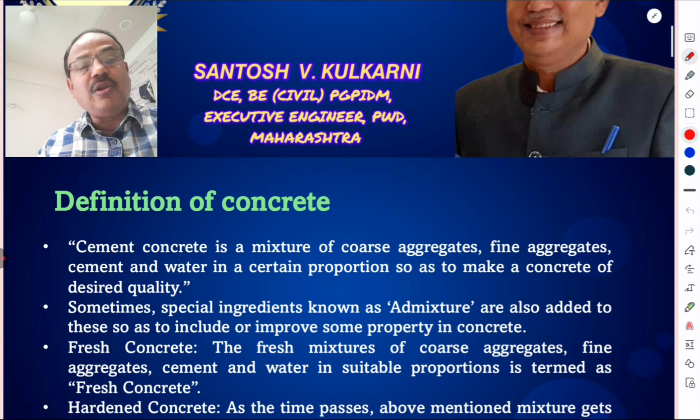First of all, what is the definition of concrete? Cement concrete is a mixture of coarse aggregate, fine aggregate, cement and water in certain proportion so as to make a mass of desired quality. Instead of concrete, I am saying that it is a mass. So this is the definition of concrete.

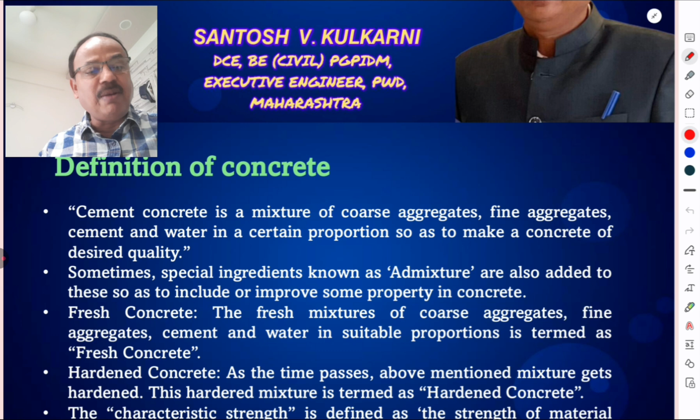Fresh concrete is the fresh mixture of coarse aggregate, fine aggregate, cement and water in suitable proportion, termed as fresh concrete.

Then what is hardened concrete? As the time passes, the above mentioned mixture gets hardened. This hardened mixture is termed as hardened concrete.

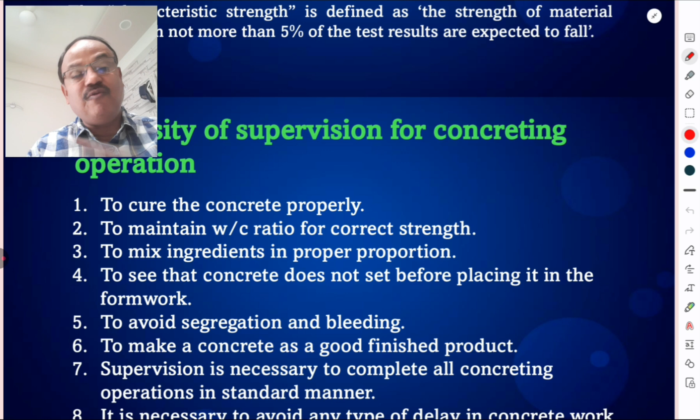Supervision is necessary to complete all concreting operations in a standard manner. It is necessary to avoid any type of delay in concrete work.

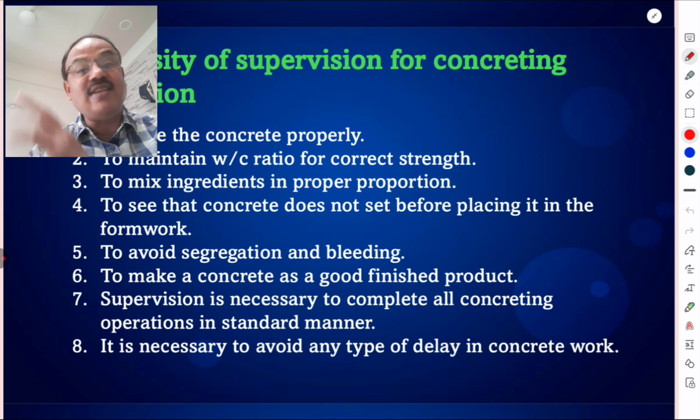The concrete grade lower than M20 are not suitable for RCC works, and grades of concrete lower than M35 are not to be used for pre-stressed concrete works.

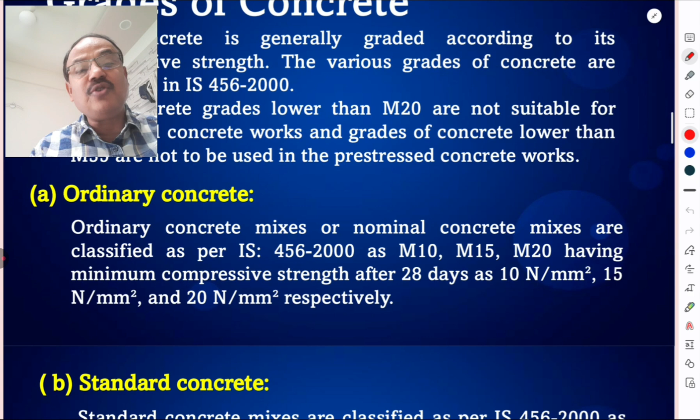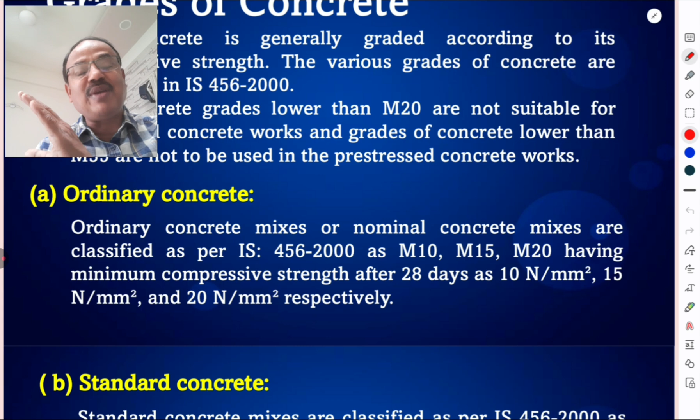Ordinary concrete mixes or nominal concrete mixes are classified as per IS 456-2000 as M10, M15, M20 having minimum compressive strength after 28 days as 10 Newton per mm square, 15 Newton per mm square and 20 Newton per mm square, meaning 20 megapascal respectively.

Then standard concrete. Standard concrete mixes are classified as per IS 456-2000 as M25, M30, M35, M40, M45, M50 and M55, having minimum compressive strength after 28 days where that number indicates the compressive strength in MPa or Newton per mm square. It is so simple.

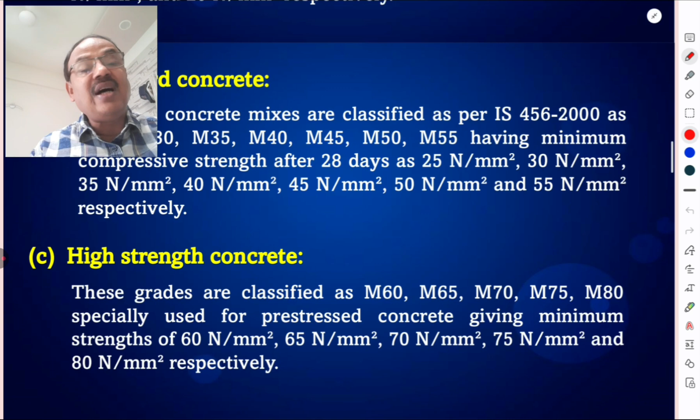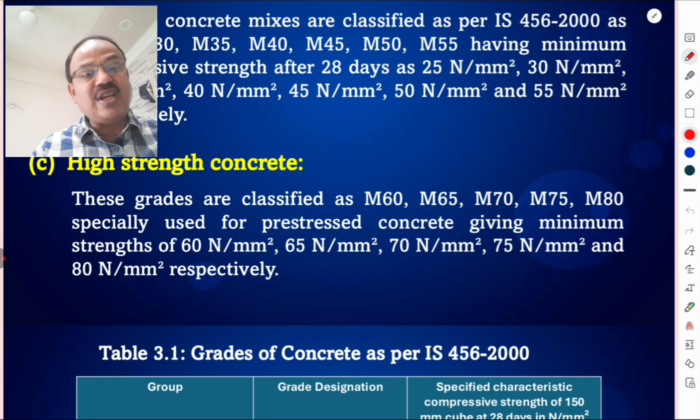Then high strength concrete. These grades are classified as M60, M65, M70, M75, M80, specially used for pre-stressed concrete, giving minimum strength as 60, 65, 70, 75 and 80 megapascal respectively.

This is table 3.1, showing the grades of concrete as per IS 456 2000. M10 has proportion 1:3:6, M15 proportion as per volume or weight is 1:2:4, and M20 is 1:1.5:3. These are the proportions as per volume, not as per weight.

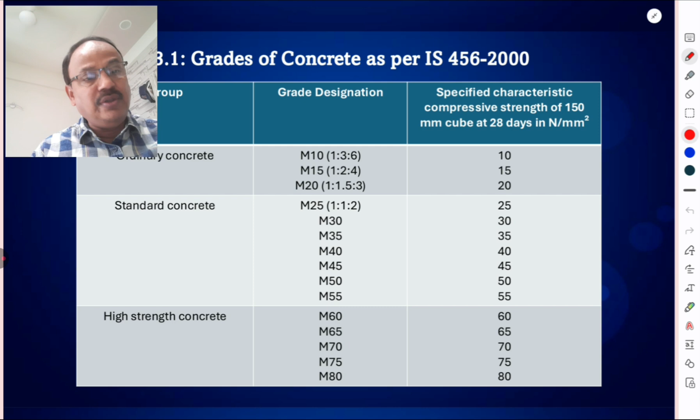Then standard concrete M25. M25 is 1 is to 1 is to 2, meaning 1 part of cement, 1 part of fine aggregate, and 2 parts of coarse aggregate. The strengths are expressed as numbers in Newton per mm square. It is so simple.

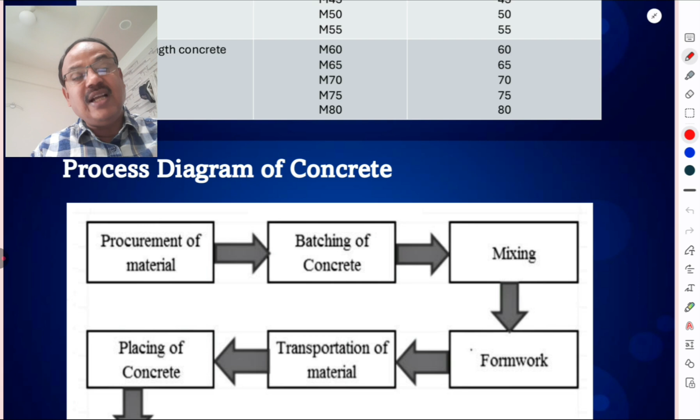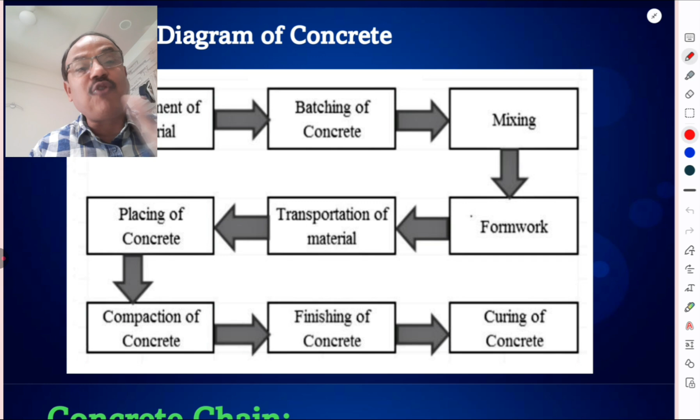Now we are going to discuss the process diagram of concrete. First we have to procure the material; that procurement is the first step. Second is the batching of concrete, meaning weigh batching or volume batching. Then mixing of concrete. After mixing, we have to make the formwork. Then we transport that material and place the concrete. After placing, we do the compaction. After compaction, we finish the concrete, and after finishing, we cure the concrete. This is the flow diagram, or process diagram, of concrete.

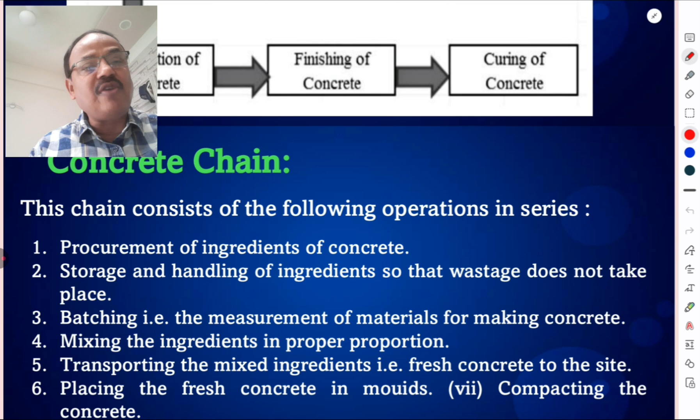One must remember all these processes. This is the concrete chain. The concrete chain consists of the following operations in series. First is the procurement of ingredients of concrete.

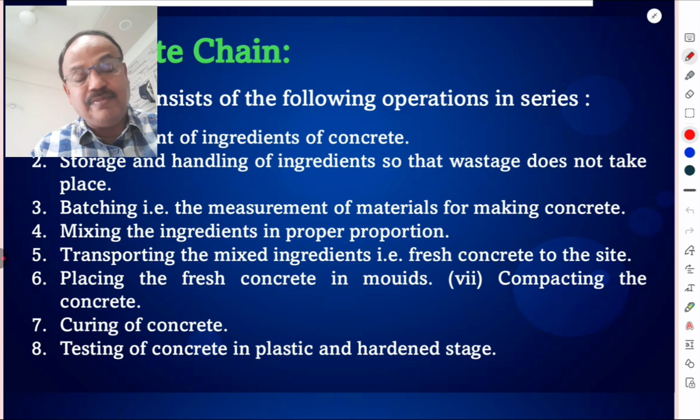Then transporting the mixed ingredients, that fresh concrete, to the site, then placing the fresh concrete in molds, compacting the concrete, curing of concrete, and testing of concrete in plastic and hardened state, or we may call it a stage.

Then this is a very important question: water cement ratio. The ratio of weight of water to the weight of cement in a concrete mix is called the water cement ratio. It is usually expressed in liters of water required per bag of cement.

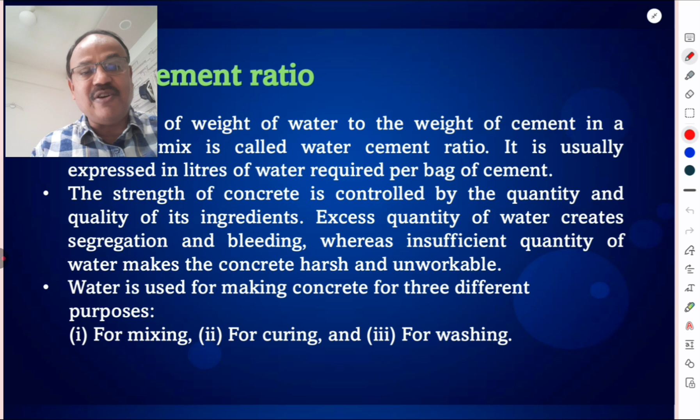The strength of concrete is controlled by the quality and quantity of ingredients. Excess quantity of water creates segregation and bleeding, whereas insufficient quantity of water makes the concrete harsh and unworkable. So we have to place the requisite quantity of water in concrete. Water is used for making concrete for 3 different purposes: mixing, curing, and washing.

Now we are going to discuss the Duff Abrahm's water cement law. It is so simple. Duff Abrahm says that the strength of concrete depends upon the water cement ratio, meaning weight of water divided by weight of cement. Water cement ratio affects the strength of concrete maximum, whereas other factors such as grading, texture, shape, stiffness, size, etc., indirectly affect the strength of concrete by affecting the water cement ratio.

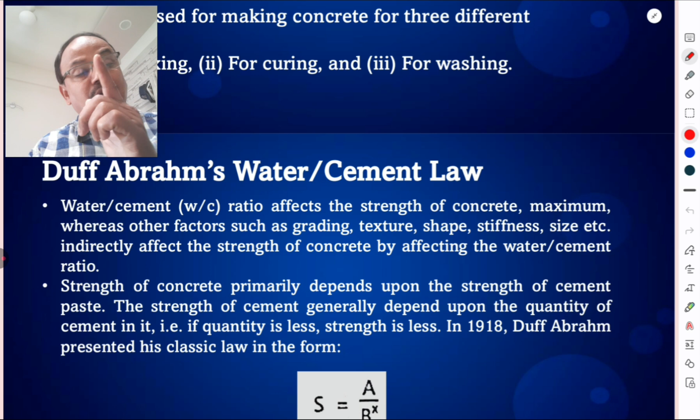The strength of concrete primarily depends upon the strength of the cement paste. The strength of the cement generally depends upon the quantity of cement. If the quantity is less, the strength is less.

In 1918, Duff Abrahm presented his classic law in the form S equals A divided by B raised to X, where X is equal to the water cement ratio, and A and B are constants. That is Duff Abrahm's law.

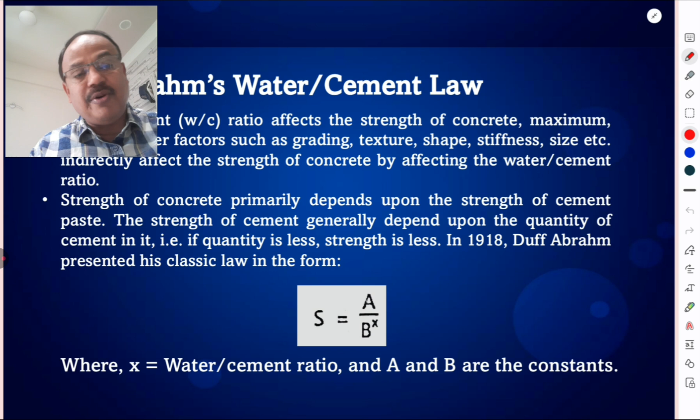But in simple terms, the strength of concrete directly depends upon the water cement ratio, meaning weight of water divided by weight of cement. Abrahm's water cement ratio law states that the strength of concrete only depends upon the water cement ratio, provided the mix is workable.

The mix should be workable. The relationship between the water cement ratio and the strength of concrete is shown in the figure. On the y-axis there is compressive strength, and on the x-axis there is water cement ratio. This is the graph.

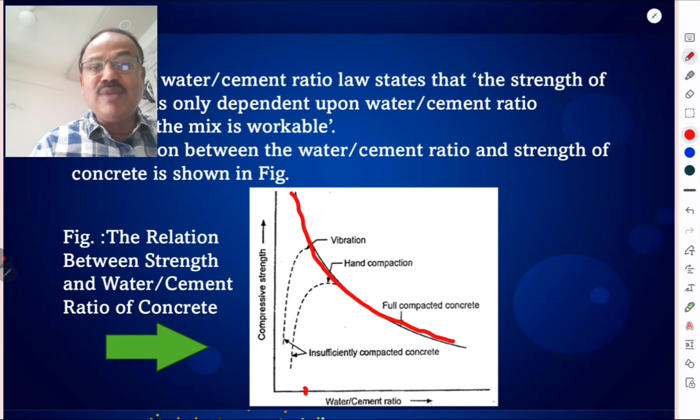When the water cement ratio increases, the compressive strength decreases. So if we want to make the compressive strength higher, we have to make the water cement ratio lower. But one must remember that the mix should not be unworkable or harsh.

And this is enough for this lecture.